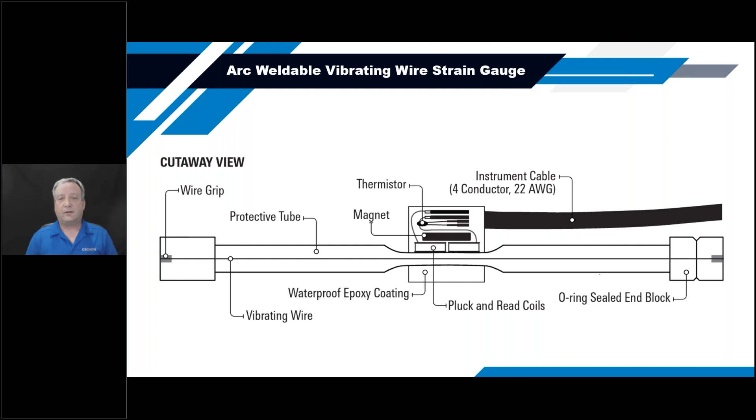The arc weldable strain gauge, as the name implies, is typically arc welded to a steel element to measure strain in the linear axis of that instrument. The gauges are 150 millimeters in length. Typical ranges associated with these strain gauges are 3,000 microstrain, but we do offer them in 5,000 and 10,000 as well. They're often welded to a steel surface, but you can also mount them on concrete as long as the concrete is a good quality surface.

It's typically recommended to drill holes and use epoxy grouted anchors for the endpoints. Some people will use epoxy as well to mount them on the concrete surface. We don't recommend that for long-term applications, because epoxy has a tendency to creep. But for a short-term application, sometimes the epoxies can be used.

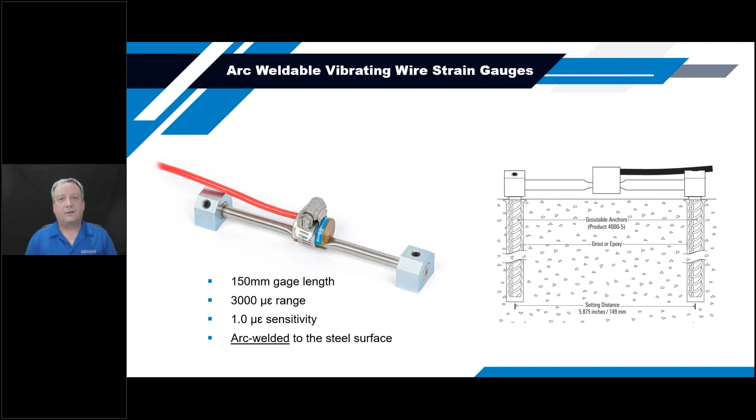Another type of surface mount strain gauge is the spot weldable strain gauge. This is basically a 50 millimeter long version of what was just described. You've got the wire stretched from one end of the gauge to the other, within the end blocks and the protective tube, and then the coil assembly over that smaller diameter tube to monitor the vibrations and frequency of that wire.

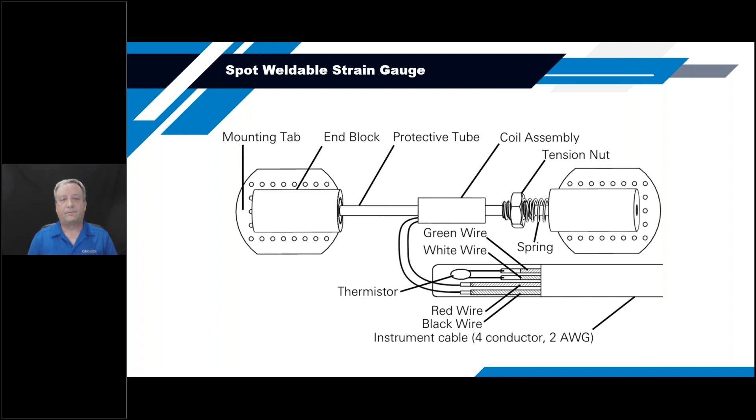These are almost always used on steel surfaces for monitoring strain. They come in 50 millimeter gauge lengths, and the ranges are 3,000 microstrain as well. There are two different types.

To protect the 4150, you put a half round tubing over it, and then spot weld small straps over the top to keep it in place. Again, these are mounted on steel surfaces only.

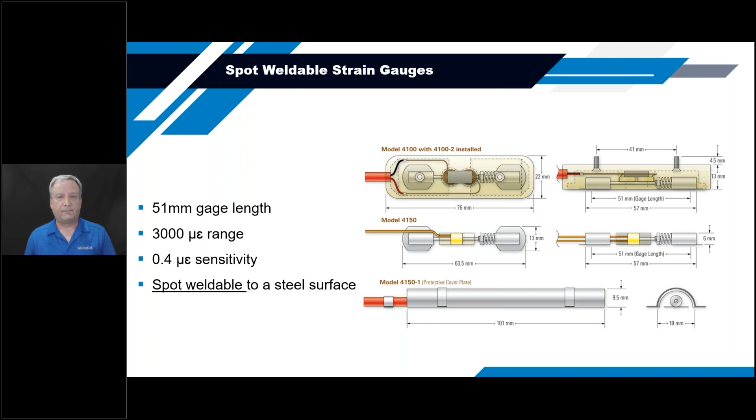Another type of instrument typically used in structural monitoring is the displacement transducer. As the name implies, you're measuring changes in strain or changes in length, similar to the strain gauge, but on a little bit larger scale. These are used for measuring joint openings or cracks on structural elements, basically measuring the change in position from the initial installed position to subsequent current positions.

A variety of different types of transducers can be used for this application: LVDTs, linear potentiometers, and of course vibrating wire displacement transducers. Today our discussion is going to focus primarily on the vibrating wire elements. So, the first type we're going to discuss will be the vibrating wire crack meter.

The springs can vary in tension depending on the range of these instruments and what they're going to be measuring. So you've got the wire and spring in line inside the body of the instrument to help maintain this position, and the coil centered around the wire to take the readings, create the vibrations in the wire and take the readings.

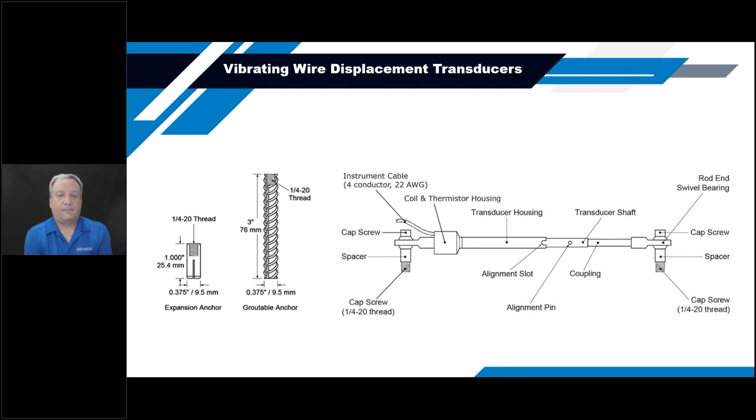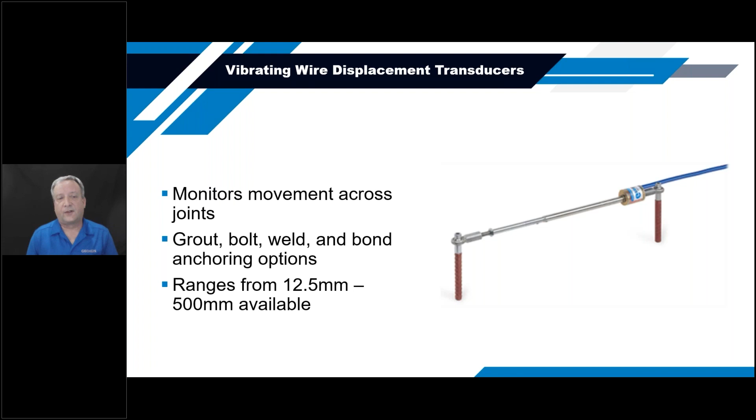The transducers come in a variety of different ranges. We offer them from 12.5 millimeters up to 500 millimeters. Typically with these mounted on a structural element, it's a good idea to provide protection, some sort of cover, so you can minimize the thermal effects directly on the instrument. These monitor the movements across joints, cracks, or large openings.

Another type of instrument used in structural monitoring is the tilt meter. There's a variety of different types of tilt meters on the market that are basically used to monitor the structural element's position with respect to true verticality. Some of the various types are MEMS types, like force balance accelerometers, or even vibrating wire type.

Basically, the vibrating wire tilt meter is constructed of a pendulous mass inside the vertical tube, suspended by an off-center elastic hinge. The vibrating wire element is in conjunction with that elastic hinge to measure the changes in verticality within the tube of that instrument.

So it's very reliable, and often if there's a lot of vibrations or a fair amount of noise associated with the installation, you can install or insert some dampening fluid into the bottom of this instrument to help dampen the pendulous mass so it's not vibrating too much.

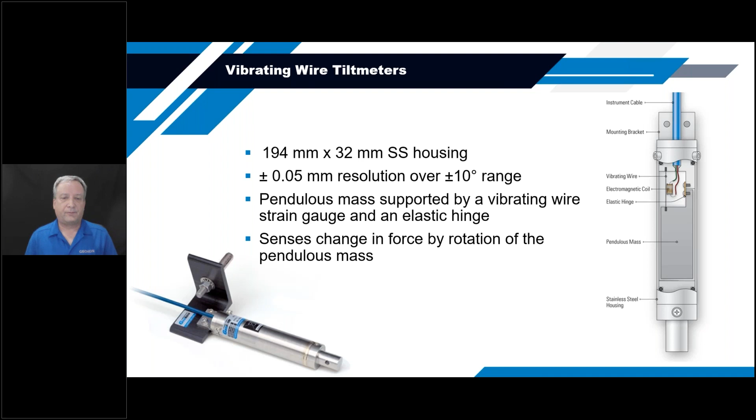Another type of tilt meter that will probably be discussed a little bit today is the analog force balance accelerometer. This is a uniaxial device that provides good measurable results for dynamic measurements, and it's fairly rugged for good outdoor applications.

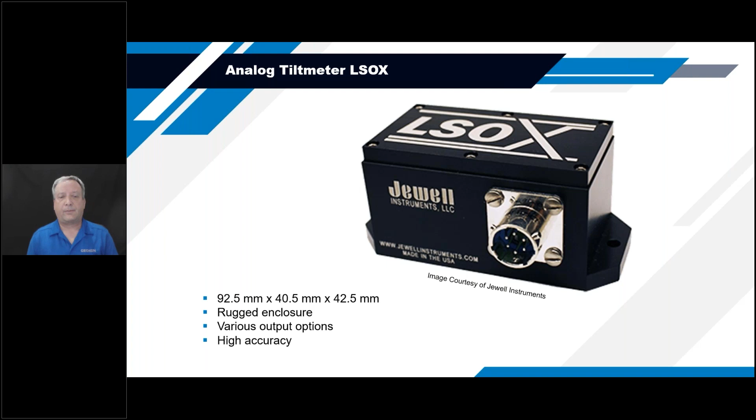Temperature sensors are also a valid and reliable instrument used for monitoring structural elements. A lot of the instruments we provide have a built-in temperature sensor, but if you're just trying to measure temperature at specific locations, there's a variety of different methods to do so. You can use RTDs, fiber optic sensors, or traditional resistance-type thermistor beads.

The type of thermistor or temperature measurement devices that Geokon provides is the thermistor type. Basically, it's a little bead that's embedded within these PVC or stainless steel housings.

You could have single nodes located at various points and provide measurements based on the resistance type of output. Or you can also have a string of these nodes attached on a single cable, either with addressable or various individual outputs for each node on a long length of cable.

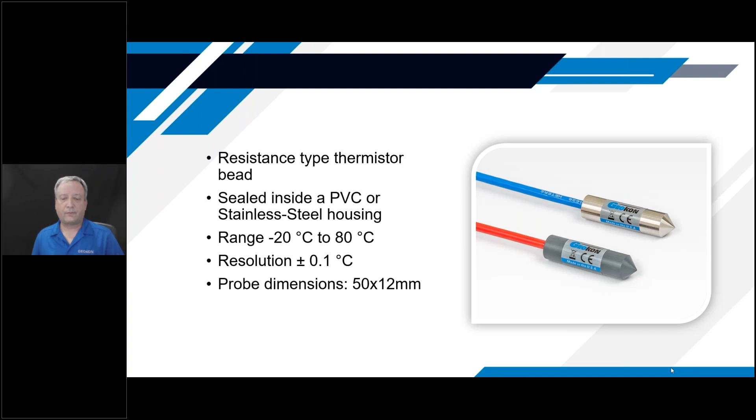The other type of instrument often used in structural monitoring is an accelerometer. These are devices used to measure accelerations and or vibrations. You can use the accelerometer output and through mathematical computation determine the velocity of the vibrations and even the displacement values, depending on how it's affixed to the structure.

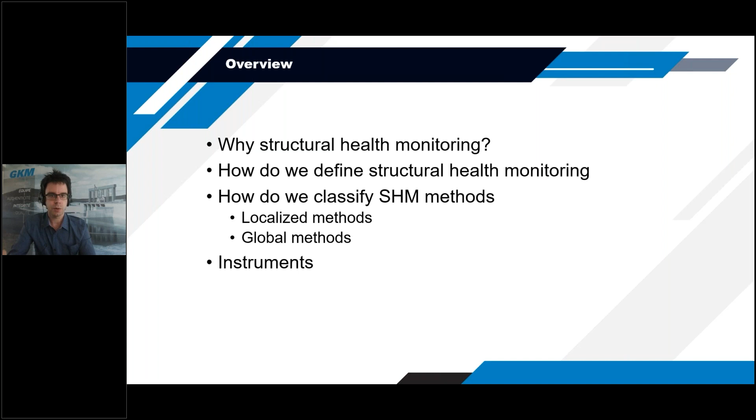What I want to do today is take these instruments and put them in the context of real large-scale projects that we've done. To do that, I want to take a step back and try to place a framework on how to think about structural health monitoring so that we all speak the same language, and then we'll see how each of these instruments fit into this framework.

So the first question you need to ask yourself is why? Why would you want to do structural health monitoring? There's a whole lot of reasons, many of which are listed here. The general idea is that there's a need to identify whether the structure is behaving as intended or not. And depending on where we are in the lifespan of the structure, this may affect the choices we make in the system design.

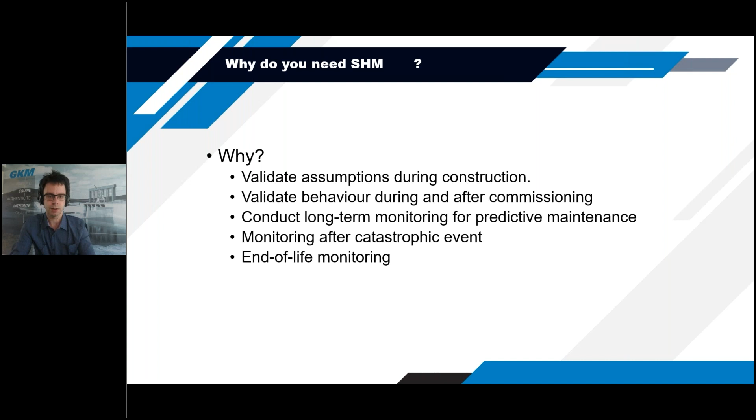And then what we will be talking about today is primarily continuous monitoring. So that would be using any of these instruments and installing them permanently on the structure and running real-time analysis and validation of what the structure is doing.

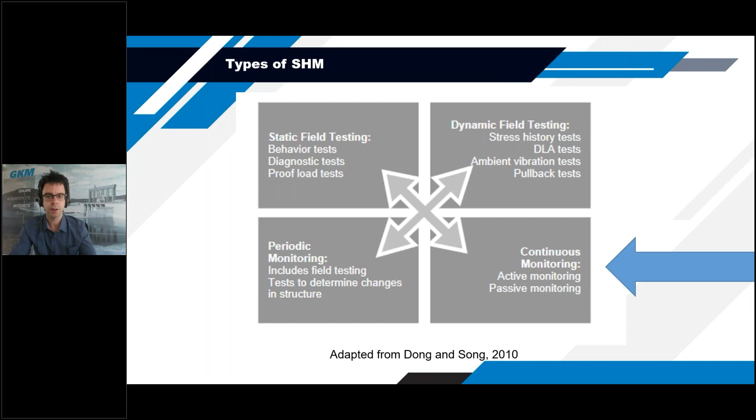And level 3 and 4 are much more advanced. To do level 3, usually you would have to have the instruments embedded in the structure from its construction, so that you know its exact baseline state, and then do your modeling from there. And level 4 would require much more advanced computing capabilities, maybe AI or neural networks, to really have a real-time status of the structure.

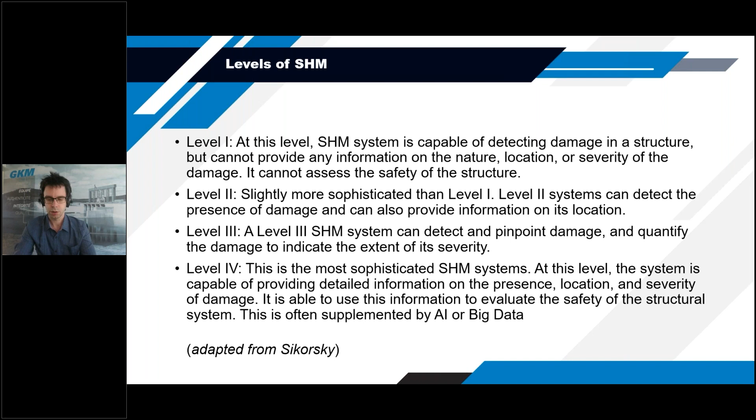I've been mentioning slow static measurements versus dynamic monitoring, and this is a pretty important distinction in any monitoring system you're going to be working on. Static systems usually means any sampling rate between 1 per hour to 1 per day, more or less. Dynamic monitoring usually is anything starting at 1 sample per second to thousands of samples per second.

Now you may be asking, what happens between 1 second and 1 minute? That's always difficult when this comes up, because the transition from 1 sample per minute to 1 sample per hour, or 1 sample per minute to 1 sample per second, requires a completely different design of the monitoring system, with different types of instruments, different types of loggers. So that's where we draw the limit.

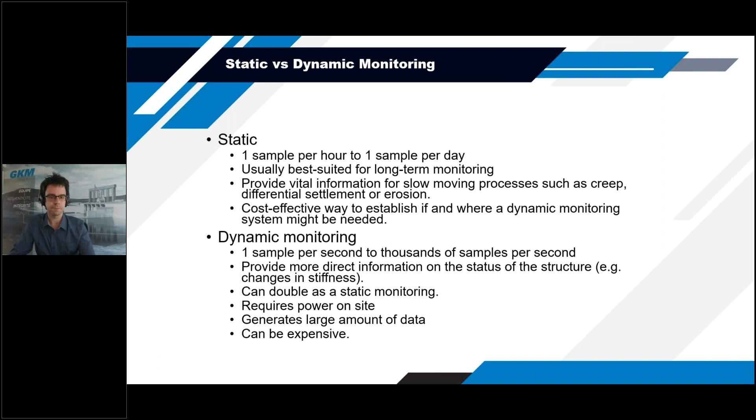Once you've established that you have slow and fast measurements, you can think of your instruments as either localized or global measurements. As mentioned in the introduction, strain gauges will give you a very specific measurement at a very specific location on a member, whether it's under load or not. Then you have global measurements, like accelerometers. So if there's an impact at the other end of your overpass, you're probably still going to pick it up with the accelerometer, even if it's at a completely different location.

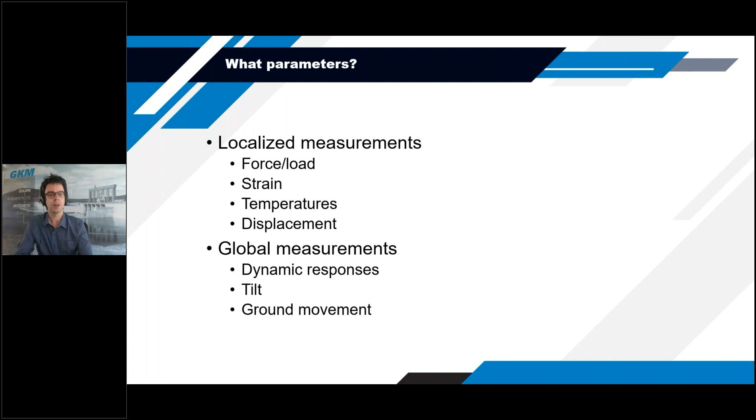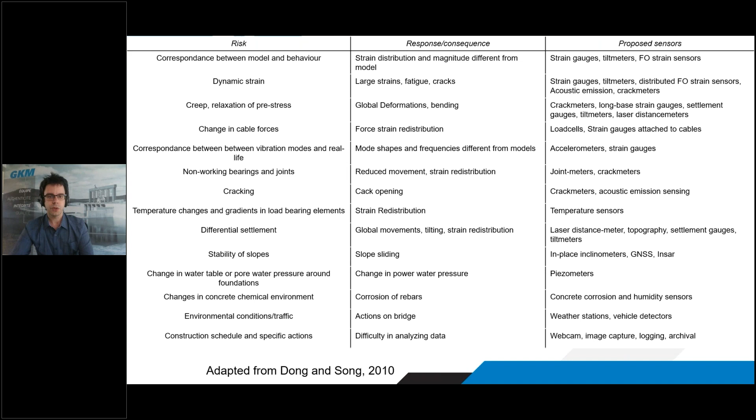So with all of this out of the way, let's dive into some specific instruments and specific examples. So strain gauges, what is measured? For strain gauges, we will be monitoring the strain on specific members or girders or parts of the structure, I-beams, whatever.

Now, you're probably aware of this, but I think it bears repeating because it comes up every once in a while. From the moment we install an instrument like a strain gauge, we can only measure changes in strain from that point on. We cannot go back in time and know the changes in strain from the construction of the structure. So that's something to keep in mind.

Another thing is that it does not give us a direct measurement of stress, which is actually what we may be looking for. If we have a good knowledge of the structure, we know how it behaves, we can have a pretty good guess at what the stress is, but we don't have a direct measurement of it.

As mentioned earlier, they can be surface mounted, embedded, etc. We're going to be talking about surface mounted strain gauges here.

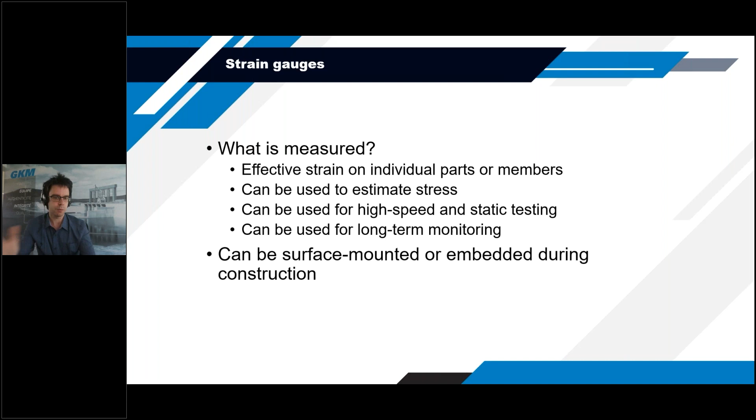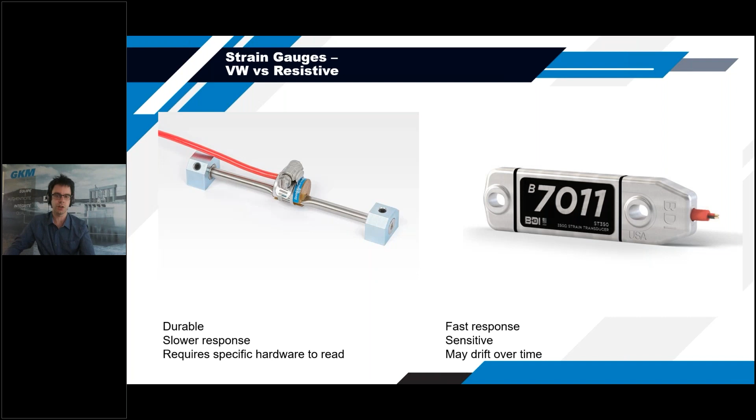On the right-hand side, there's an example of a foil strain gauge by BDI that is completely packaged in a protective enclosure. Foil strain gauges have a very fast response, they're very sensitive, but they can drift over time. So if you're looking at doing long-term monitoring, you can't really rely on that. To an extent, it's even recommended to reset it, to bring it back to zero regularly, and only use it for dynamic events, measuring only changes during those dynamic events.

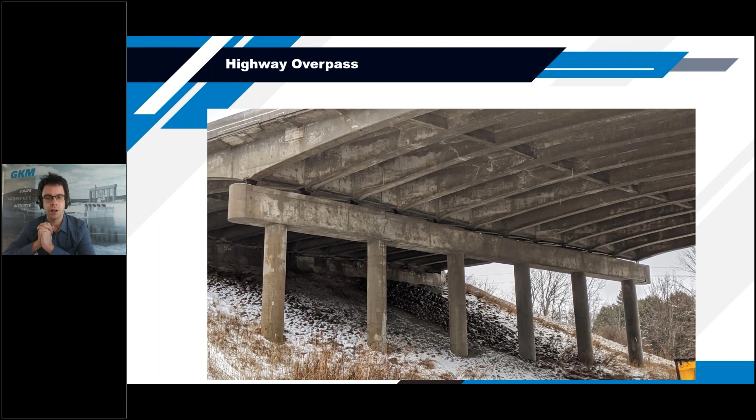This is an example from a project we worked on in Eastern Canada. This is a highway overpass. There are 11 concrete girders that are not in the best of shape, as you can see there. So we went in and installed vibrating wire strain gauges there. Obviously it's a concrete structure, so we used grouted drop-in anchors, and they were attached to the blocks like this.

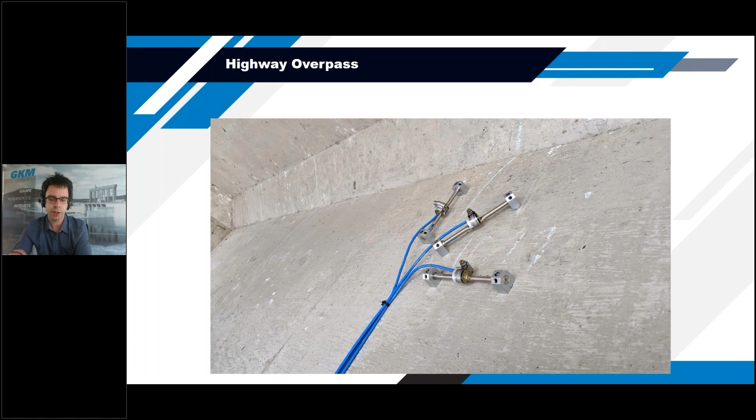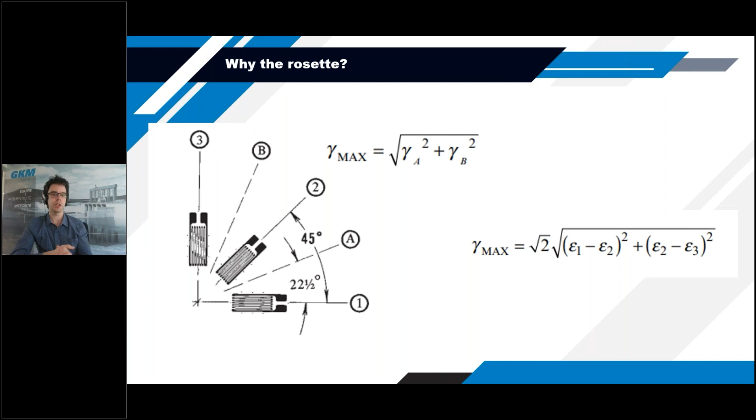You may be wondering why 3 strain gauges like this. The reason is that we knew we wouldn't have uniaxial loading, and this gives us a quite direct measurement of shear in addition to axial loading.

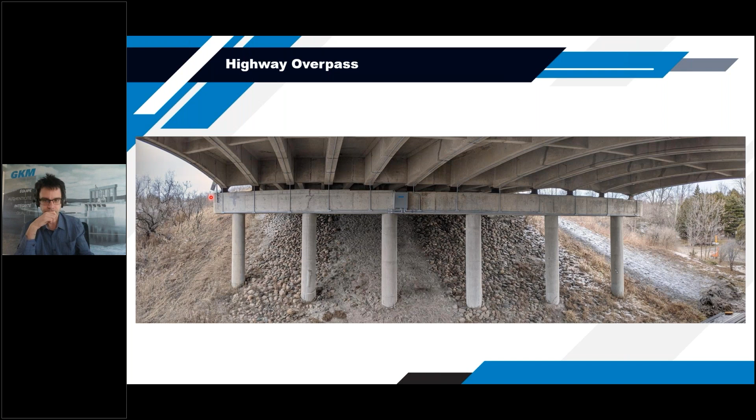In this case, we were asked to do fast measurements, 20 samples per second. There were a few reasons for that. The main reason is the overpass owner wanted to do live tests with known loads. They needed to see exactly how each girder behaved while a known load was traveling over the overpass. They also have really good traffic statistics, so we did 4 bursts of high-speed data per day, and they could track how the bursts changed over time.

In addition, since it's a fast measurement, we can also decide to take slow readings every once in a while. This is better for long-term monitoring, to do it like this and have both in the same system. However, because we need fast measurements and need to collect data in real time from dozens of instruments, everything has to be fully wired. I'll get back to that in a few minutes.

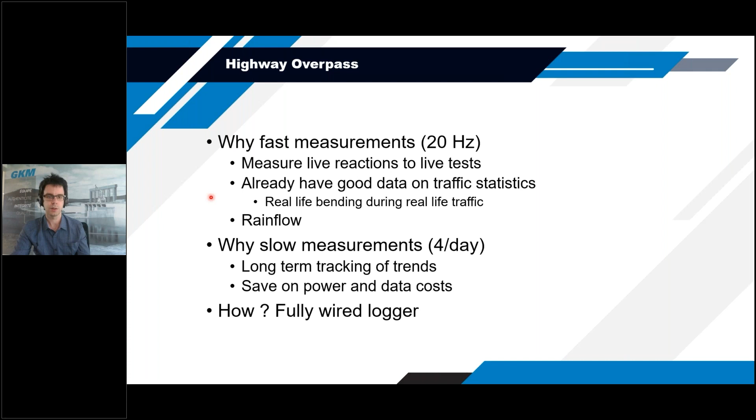This is another example from a bridge, a steel truss bridge, still in Eastern Canada, where we had these vibrating wire strain gauges installed in specific locations, about 70 of them, as well as a few resistive or foil strain gauges in a few locations.

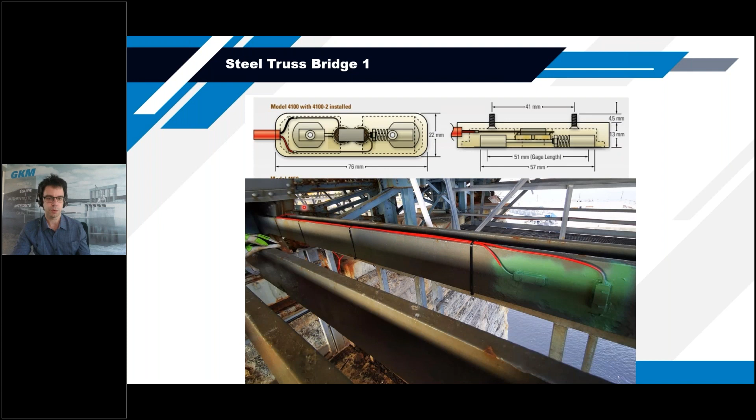You can see that they were all installed under covers with anti-rust, rust-proofing paint. In this case, it was not deemed necessary to run the cables into conduits, but all the cables are nicely strapped to the structure all the way back to the data acquisition system.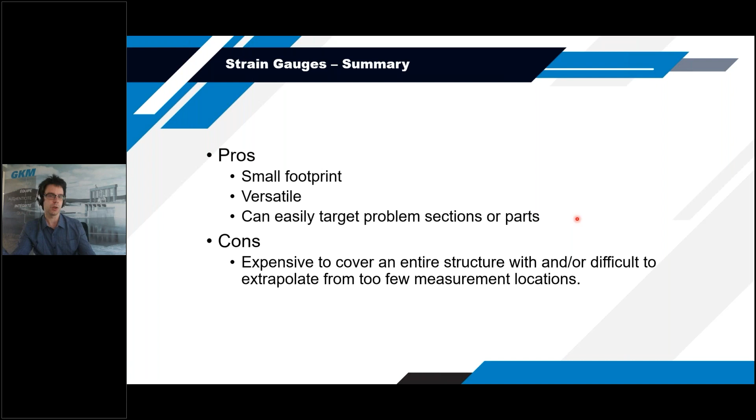Quick summary on strain gauges: they're very versatile, and can very easily target problem sections or parts. One con is that it can be expensive to cover an entire structure with them. If you want to install 200, you may need to run 200 separate cables along the structure. This is very time consuming, and bridge owners typically don't want to close their bridges for days for this kind of operation. Something to keep in mind.

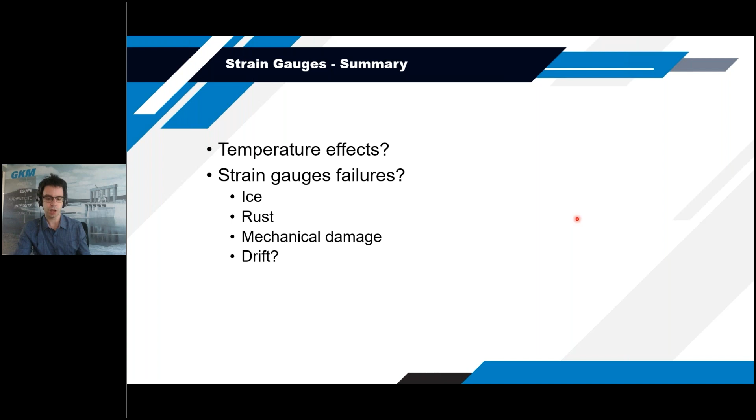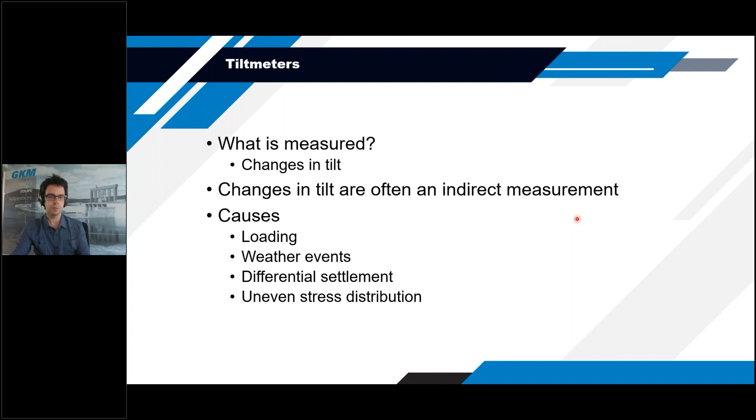Tilt meters, not going to spend too much time on that. They measure changes in tilt. A lot of different things can change tilts of the structure, so it's an indirect measurement in a lot of cases, but it can be very sensitive to changes in the structures, in the footing, differential settlement.

On the left, on a steel truss bridge, you can see a force balance tilt meter. It's very sensitive, but in theory it can drift over time, so it may be necessary to replace them. This means you need to have a plan with backup instruments and scheduled maintenance to go and replace them, send them to be calibrated, etc.

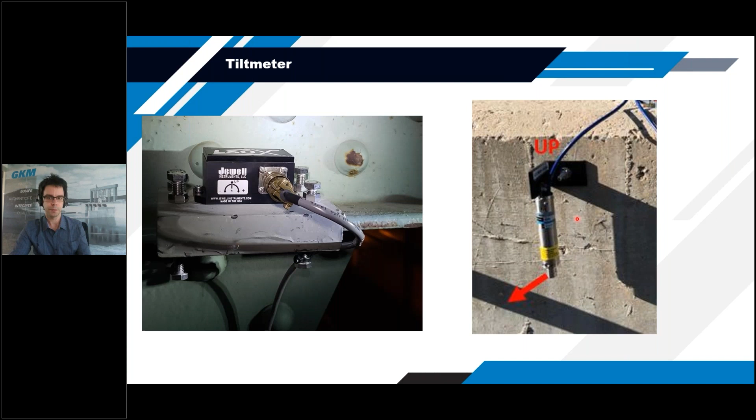On the right, there's an example of a vibrating wire tilt meter attached to a spillway. I'll come back to this in a few minutes.

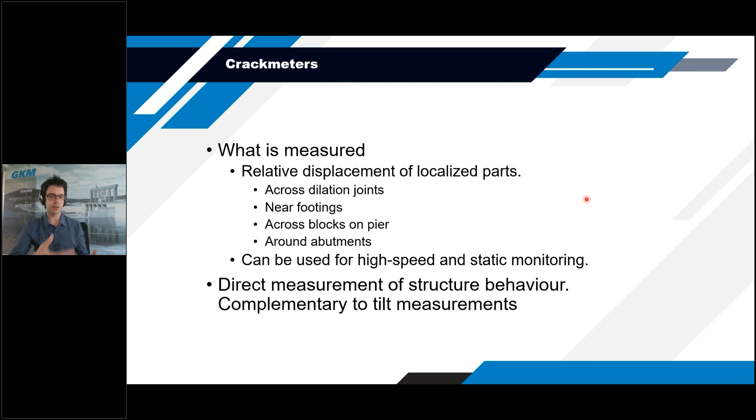Crack meters, at a very basic level, a crack meter and a strain gauge are very similar types of instrument. They measure changes in position between 2 points. We may use them across dilation joints, near footings, across blocks. It's a pretty direct measurement, and it's complementary, let's say, to tilt or strain measurements.

Here's an example. This is a lock, still in Eastern Canada, where this structure is in the middle of the canal near the locks, and there's a crack running the entire length.

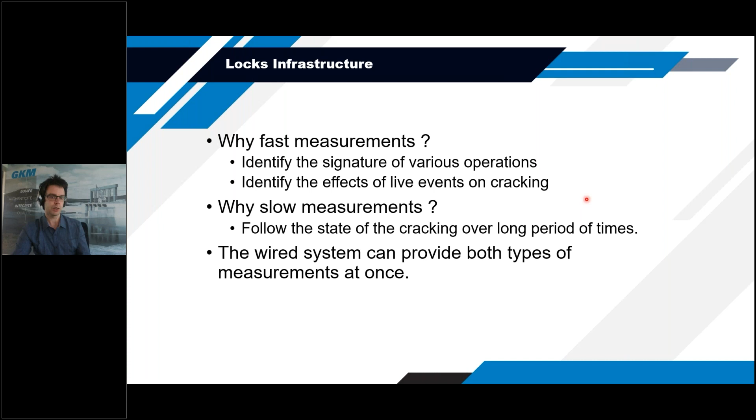So major crack, we put in crack meters, and we did fast measurements here because we wanted to see if the crack responded to any of the events that would typically occur on the structure. Could be the bridge going up and down, railway traffic, vessel impacts, etc. We also wanted to be able to do slow measurements. Now this didn't go quite as planned. We were not able to properly identify each type of event, or at least that the crack responded to these events. So now the system works as a long-term monitoring of any changes in the crack over time.

This is a spillway infrastructure in central Canada. On the left there is a tilt meter. On the right there's a triaxial crack meter, so to measure opening, differential settlement, and movement in and out of the plane.

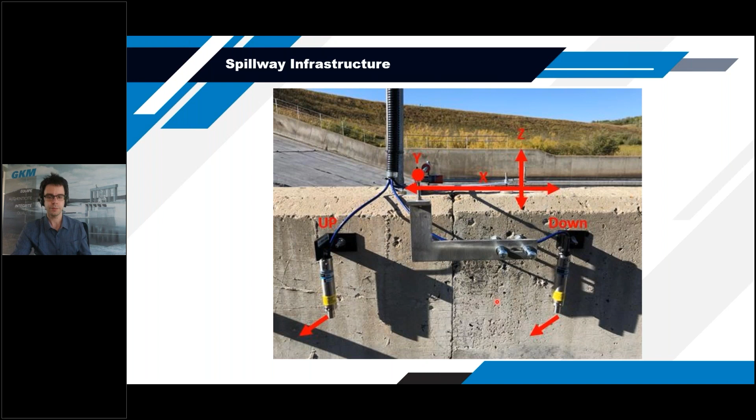Now in this system, it's a spillway. It's not actively used, the water level is pretty stable, so there was no reason for us to do dynamic monitoring there. Measurements like 3 or 4 times a day is more than enough for what we're trying to measure over long periods of time. So in this case, using a completely wireless and battery-powered system makes a lot more sense, because you save a lot of manpower on installation, and these systems also tend to be less expensive than dynamic monitoring systems.

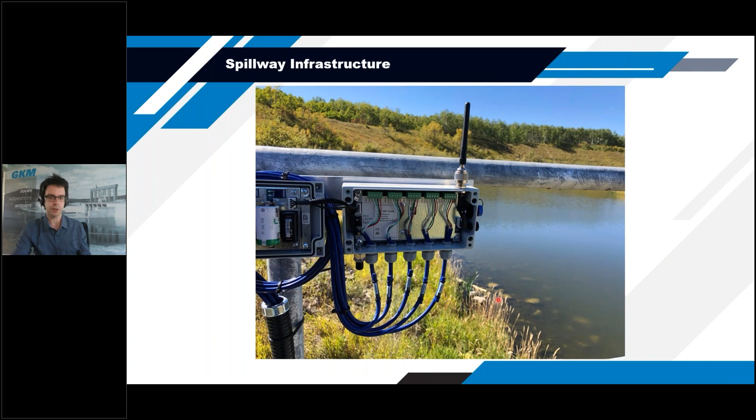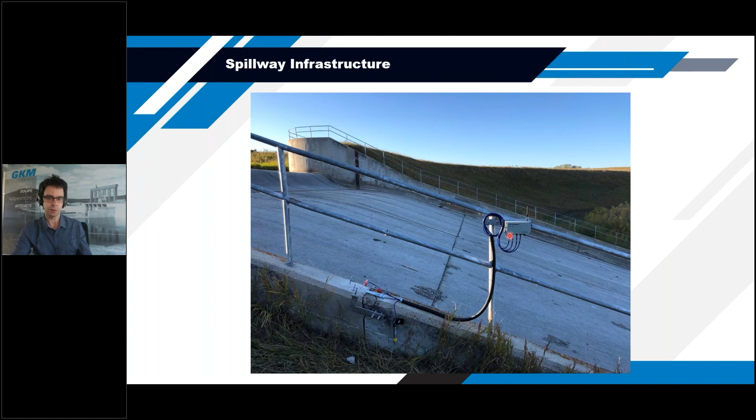So if we take a step back, we can see the instruments in the bottom left there, and the instrument cables just run to this battery-powered enclosure. And if we take even more steps back, we can see the data logger here with internet connectivity. Along the structure and across the water, we have the instruments with their radio loggers sending their measurements back with the antenna to the internet-enabled station.

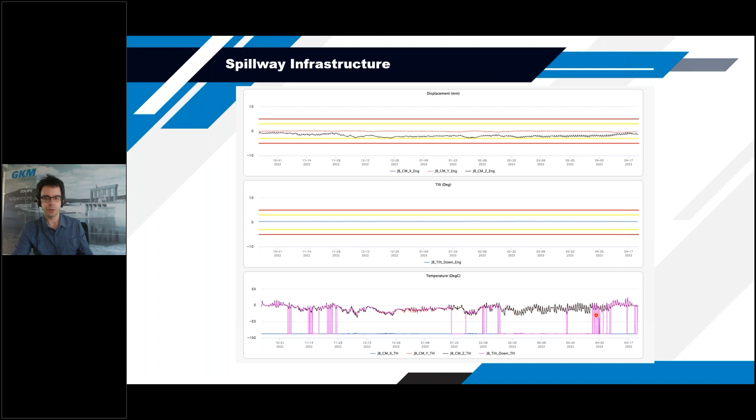So we can see that the instruments were very stable over long periods of time. Same for the tilt meters. There were a few hiccups with some of the temperature sensors, but it was not a big deal for this project.

So temperature sensors. All the instruments we mentioned so far contain a temperature sensor, but in some cases we may need to add more. The reason is that temperature affects the structure. So if the sun is shining on one side, that side's going to get hotter, it's going to try to dilate, then the other side will not dilate as much.

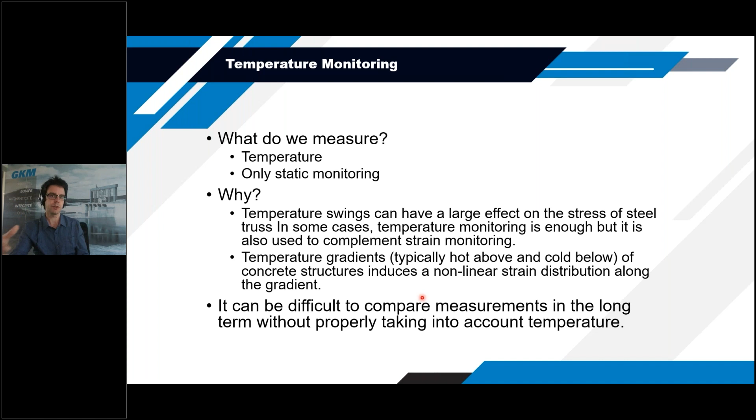And structures like dams and bridges are designed to take that into account and to have some flexibility in the structure. That being said, older structures like the first steel truss bridge I mentioned have become very stiff over time. So any changes in temperature can add a lot of stress on individual members, and having a complete picture of the temperature distribution is necessary to do all the analysis of the strain measurements.

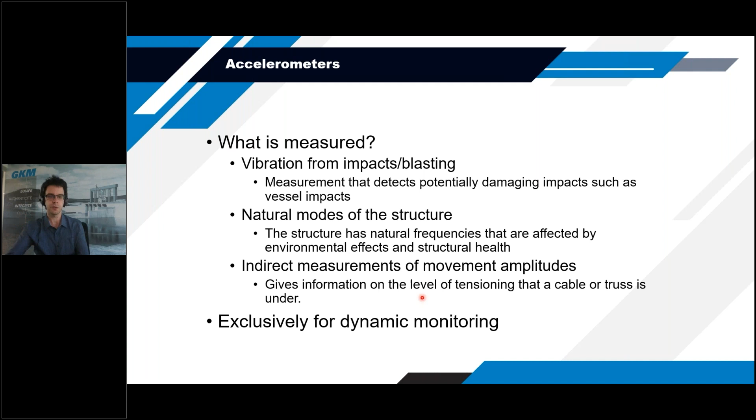Accelerometers. This is my last instrument type for today. Accelerometers are a bit on their own, a different family of instruments, different type of analysis, but still very commonly found in structural health monitoring. We can measure several things with it, such as the natural modes, vibration from impacts, from blasting, etc.

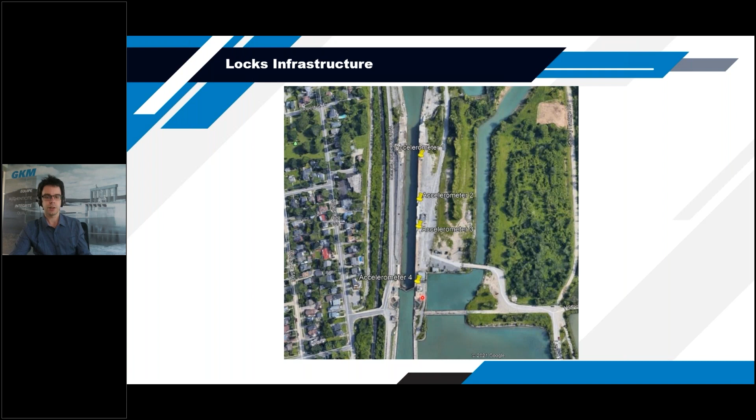And I'll give you 2 examples. This is for a lock infrastructure still in Canada. In this case, we have installed accelerometers to detect vessel impacts, because there was damage being observed on the structure, but they didn't know exactly where it came from. One of the hypotheses was that it came from vessels either hitting the walls or scraping the walls of the structure. We did that monitoring for about 6 months, and over 6 months we detected maybe 7 impacts, and they were not very strong. So the structure owner may have to look somewhere else for where the damage comes from.

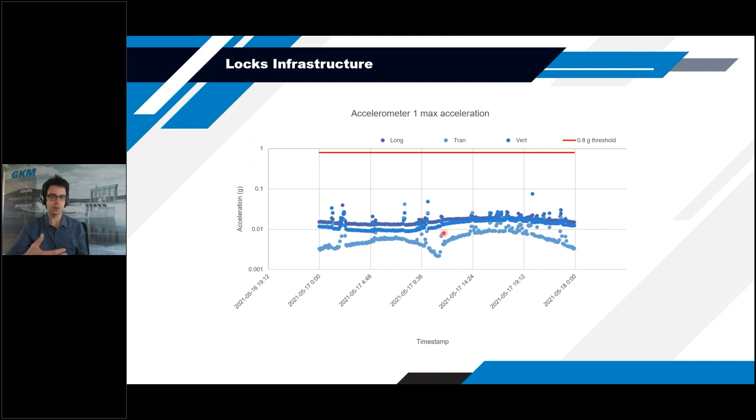This is an example of one such event. So future steps of that project would be to have a camera on site, or have the monitoring system be able to interface with the surveillance system they have and automatically pull images from vessels, from the cameras, if any such event is detected.

But this can only really be done with accelerometers. And then if we've properly established that events such as this are rare, then it may be necessary to install other instruments like strain gauges, tilt meters, to perform long-term monitoring of the structure to make sure it's not just degrading on its own.

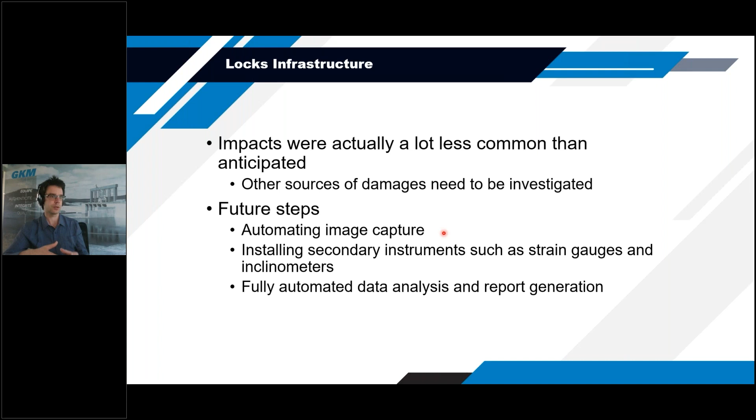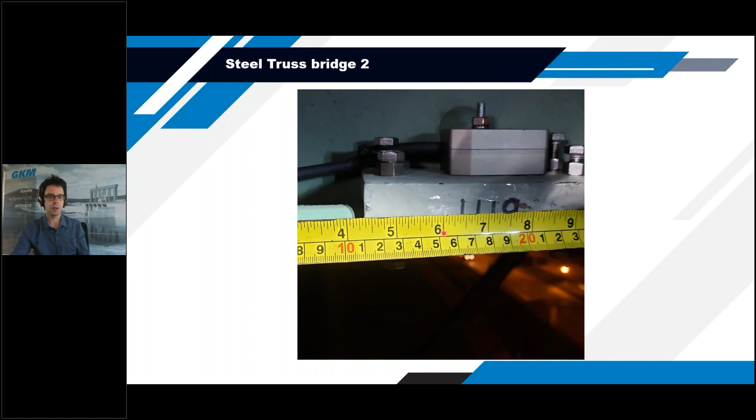Second example of another type of measurement that can only be done with accelerometers was on the second steel truss bridge I mentioned. We were able to monitor the modes of the structure, so we can measure that the structure vibrates in very specific ways that were in line with the modeling from the structural engineer.

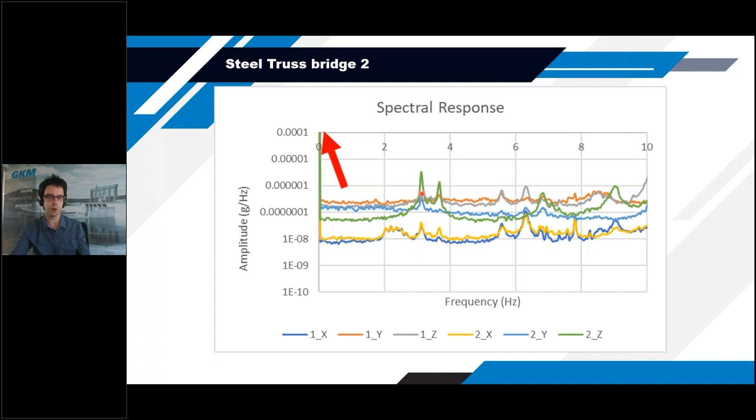So for a steel truss bridge, it turns out that it may not be sensitive enough, and it takes a lot of damage for these peaks to shift significantly. But it was a trial project from the bridge owner. For a cable stayed bridge, however, it's a very sensitive measurement. Any change in tension on the cable stays can have a huge impact on the position of these frequency peaks.

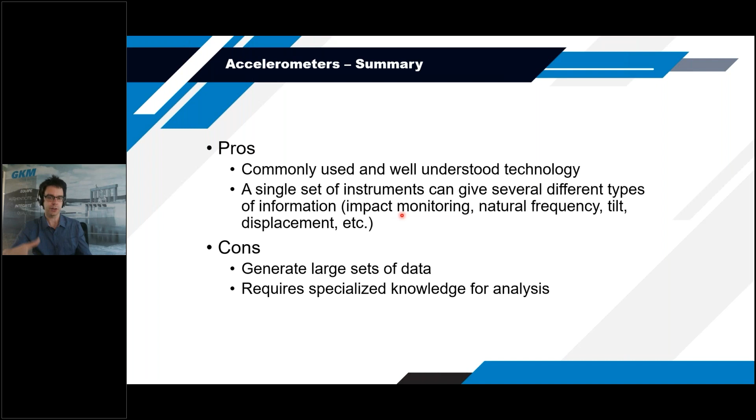So accelerometers themselves are well understood. If you know how to use them, you can get a lot of information from them, but they generate large sets of data and they require specialized software analysis mathematics to get the most out of them. The same types of instruments can give different types of information depending on their acquisition frequency, if it's going to be for single tests or long-term monitoring, etc.

In addition to this, there are other global methods that can be used that are becoming more and more popular, such as InSAR. This is measurements from satellites that measure elevation of the ground or of the structure. There's also automated total stations to track the position of prisms on the structure, and GPS receivers on the structure to track their position very accurately over time. So it's a whole wide world out there, lots of options, keep your mind open.

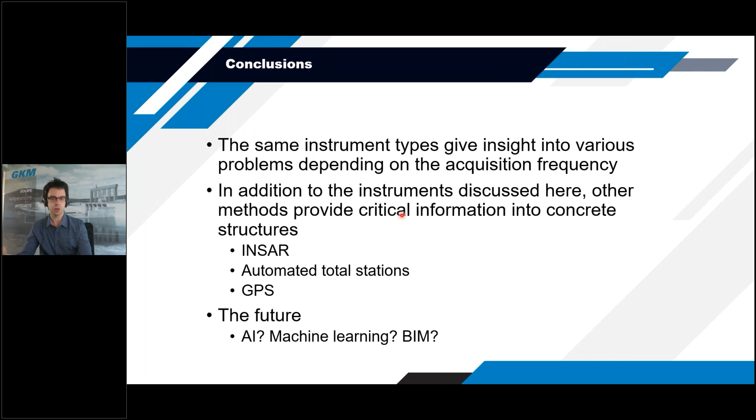And for the future, well, the hardware is pretty mature. The future is probably in modeling, AI, digital twins, these kind of things. So this is something you will be hearing more and more about, especially for newly built structures.